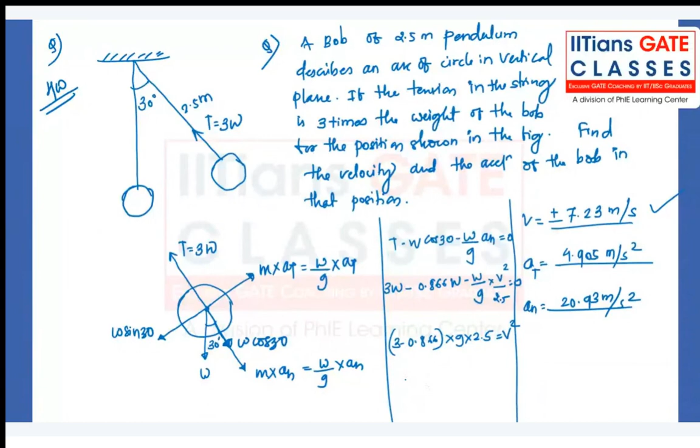Similarly, for the tangential force, if you do tangential acceleration at, so mass times at - let me go to the next slide - what we have is m*at, that is, you can say w by g. At is equal to the sine component of the weight, sine of 30, look at the figure. So this has to be equal to this, and here also you can cancel out w. And at you can calculate as g sine of 30, so at will be equal to 4.905 meters per second square.

And an, an is equal to v square by r. V square is 7.23 whole square divided by r which is 2.5, so you'll get 20.93 meters per second square. So you should be able to solve these kinds of problems as well, where you have to deal with not just a single acceleration but two components: tangential and normal.

So let's start some questions on the work energy principle. You are already aware of it - what is the work energy principle? So you should be able to solve it. We have already solved some questions on it, so this is just a problem solving session for you.

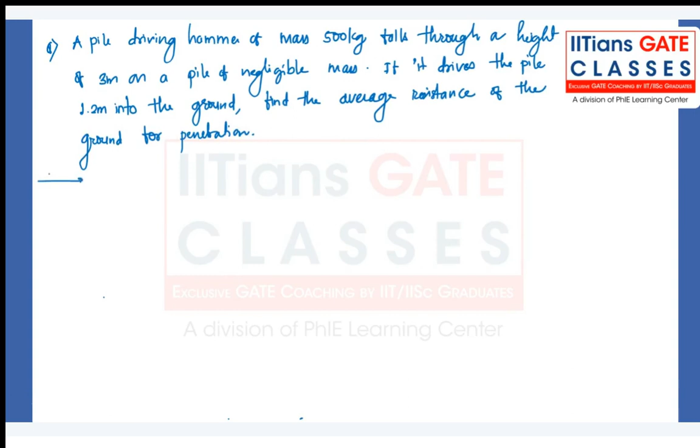A pile driving hammer of mass 500 kgs falls through a height of 3 meters onto a pile of negligible mass. If it drives the pile 1.2 meters into the ground, find the average resistance of the ground for penetration. So we have a pile driving hammer of mass 500 kg falling through a height of 3 meters, onto a weight-negligible mass pile, and if it drives the pile 1.2 meters into the ground, they are asking us to find the average resistance of the ground for penetration.

Yes, try to solve it. I'll give you one minute of time. You solve it and post your answer.

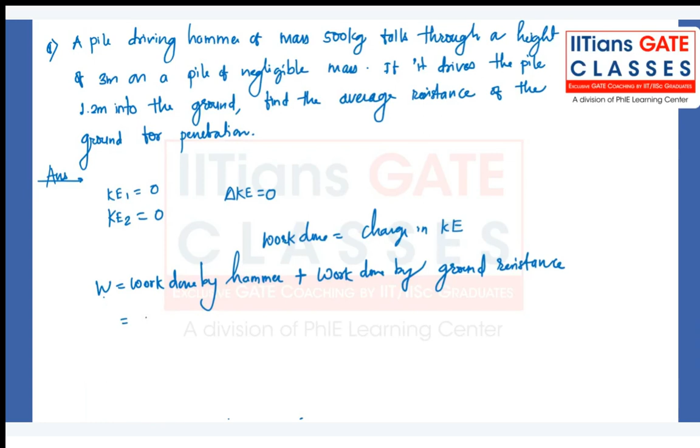And how much work is the hammer doing? The weight, mg, is the weight of the hammer, and how much distance it is traveling is h1 plus h2. Let's say this is the hammer, this is the pile. This distance given is 3 meters, and later it goes deeper inside after hammering, which is 1.2 meters. So this has h1, and h2 is equal to 1.2.

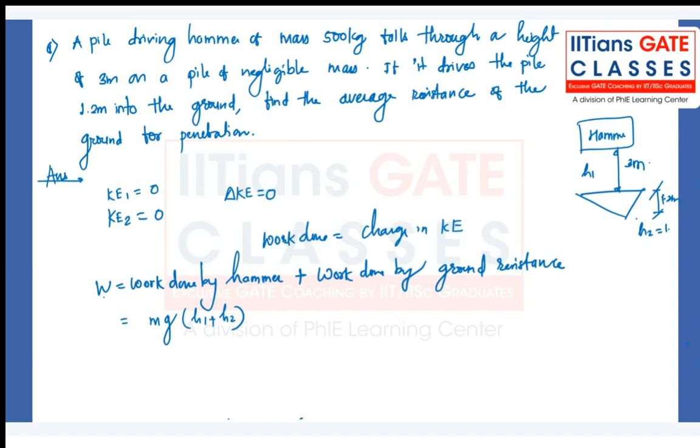So weight is mass times acceleration due to gravity, and h1 plus h2 is the work done by the hammer. The work done by ground resistance: let R be the resistance by the ground, and it will give resistance only for h2, because before that the hammer is not in contact with the pile. So the only distance traveled by the pile against ground resistance is h2. That's why R into h2 we are considering, and it is equal to 0 because work done equals change in kinetic energy.

So from this, R can be written as minus mg times (h1 plus h2) divided by h2. That equals minus 500 into 9.81 into (3 plus 1.2) divided by 1.2. If you solve it, you get around 17 kilonewton. The minus sign indicates it is opposite to the work done.

The direction of this force is opposite to the weight, so you can remove the minus sign and say it is upward. 17.16 kilonewton is the resistance of the ground for the penetration, and the direction is upward. Any doubt in this question? If it is clear, then let's move to the next.

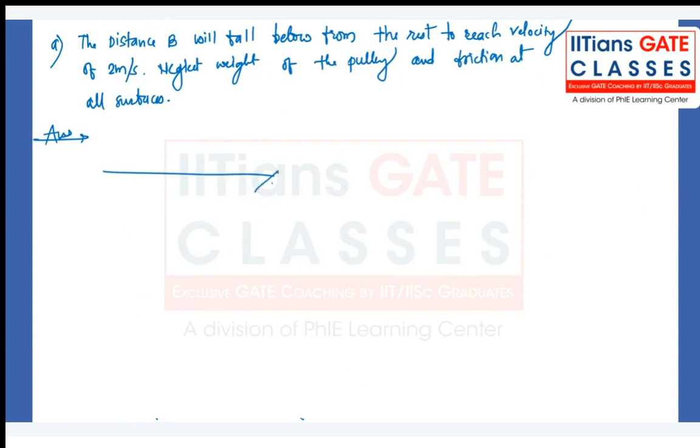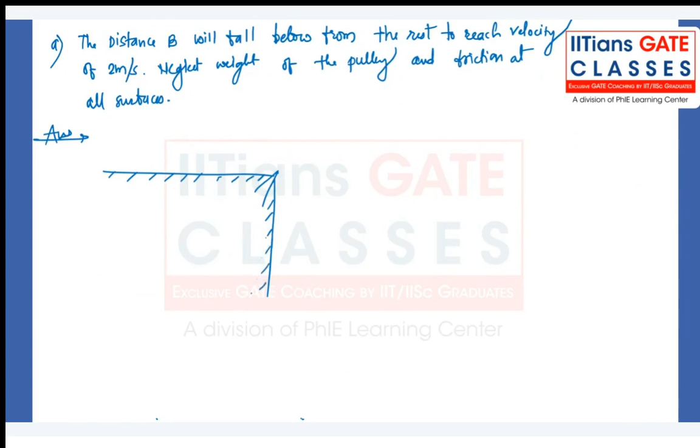Let me help you out with the figure here. A, which is 50 kg mass, is attached through a pulley to weight B, which is 80 kgs. The tension in the string, and this is a smooth pulley. So this is the diagram.

I'll repeat the question: the distance B will fall below from rest to reach a velocity of 2 meters per second. So how much distance has it traveled? That you have to calculate. Let's call it D or S, in order to achieve the velocity of 2 meters per second.

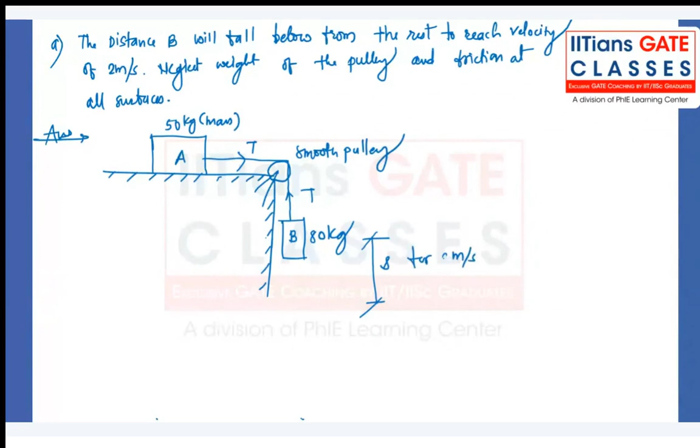So here, first we'll solve the problem without considering the friction, and next the same problem we have to solve considering the friction afterwards. So I expect you to at least try to solve it without friction first, since it will not be that difficult.

Yeah, has anyone got the answer or not yet? Maybe I'll wait for 1 more minute.

It's not that difficult. Wherever distance is mentioned in the problem, you have to solve with the work energy principle. Whenever acceleration is supposed to be calculated or involved, you have to use D'Alembert's principle. And wherever time is mentioned, you can think of the impulse momentum principle. So remember this basic logic: mainly if distance is involved or to be calculated, use the work energy principle. If they are asking you to calculate something related to acceleration, then D'Alembert's principle will help you. Keep this trick in mind.

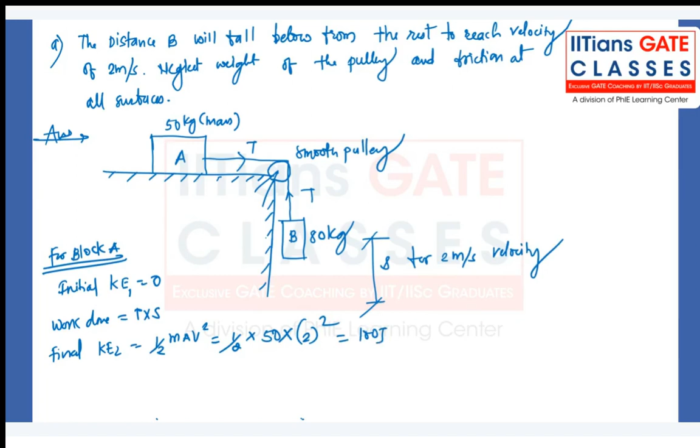If block B is moving with 2 meters per second, block A will also move with the same velocity. So K1 is initial kinetic energy, K2 is final kinetic energy, and that will be equal to 1 half m into v square. So 1 half into 50 into velocity 2 square, so it's 100 joule. The change in kinetic energy is nothing but the work done. So T multiplied by S is equal to 100 minus 0. If you know the tension in the string, you will be able to calculate the distance. So T dot S is equal to 100.

That is the first part. So if you consider now block B, we can clearly see kinetic energy 1 is equal to 0, and kinetic energy of the second block is 1 half mv square, that is 80 into 2 square, and that is 160 joule.

And work done in this case is how much? Work done will be different here. Why? Because if you look at the block, weight is acting downward, tension is upward. So work done is equal to W into S minus tension into S.

Tension is acting in the upward direction, weight is acting in the downward direction, and the body is moving in the downward direction. So total work done is W minus T times S. You can write it as WS minus TS. So it is 80 into 9.81 into S minus TS.

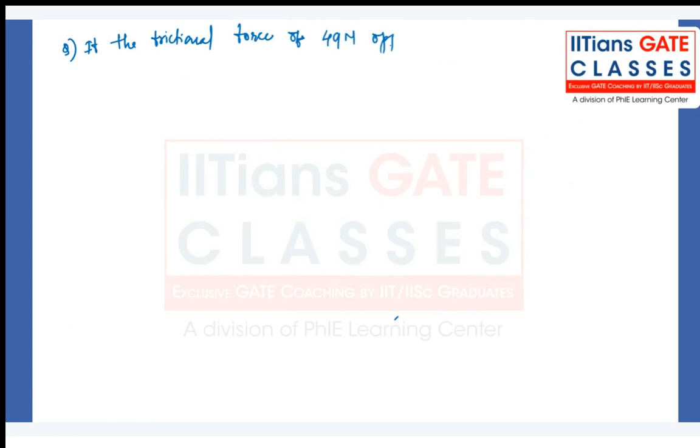Now a little bit of complexity to it. Same question you have to solve. I expect you to solve it now because you know the process. Just a little bit of difference here. If the frictional force, let me go to the next slide. The frictional force of 49 Newton opposes the motion of a... find the time required now.

A little bit different: time required for B to reach a velocity of 2 meters per second. Okay, same problem, just things are slightly changed. We've got a frictional force for body A, and rather than asking distance, now they are asking you the time.

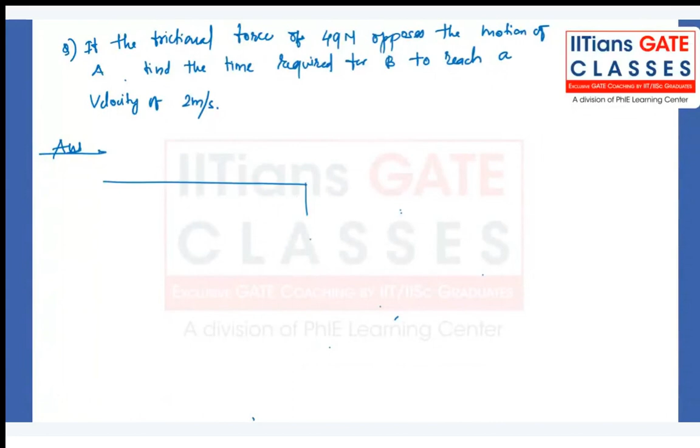Okay, we got it. Vidhi, I'll go to the previous problem once we solve this. Okay. Or it's not even needed because we are solving the same problem. Let me help you out. So here we have a pulley. Here we have a mass A, and like this we have a block B here.

Okay, so in the previous problem, the question was the distance traveled by B to reach velocity 2 meters per second.

Final kinetic energy is half of m v square. Sorry, the distance we don't know, velocity we know, that is 2 meters per second. So half of mv square. So 100 joule is the kinetic energy once it reaches the 2 meters per second velocity, and the initial kinetic energy is 0. So change in kinetic energy is 100 minus 0, that is 100, and that is equal to the work done.

Work done here is only from the force which is driving it, the tension in the string, because there's no frictional force. So tension in the string multiplied by distance traveled is equal to 100. Tension is unknown, and S is also unknown, that is the distance traveled.

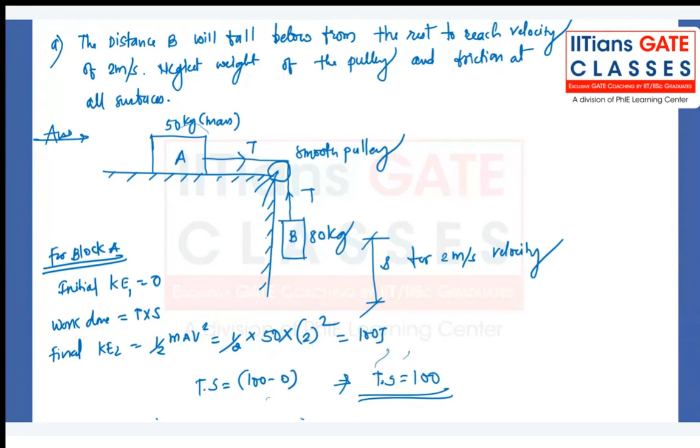So in order to calculate it, we have drawn the free body diagram of block B. In block B, we can see the motion is downward, right? But which is the driving force for this work done? That is W minus T. So work done is equal to W minus T into S, where S is the distance traveled. So W into S minus T into S is the work done.

Again, initial kinetic energy is 0, final kinetic energy is half mv square, which is 160. So 160 minus 0 is 160, and that is equal to W, which we know is 80 into 9.81, into S minus TS, which we have calculated previously, that is 100. Since it is a frictionless pulley, we can directly put 100 here.

Otherwise, this term would change. And yeah, that's all. From this, we calculate the value of S. Is it clear, Vidhi? Any doubt in the first question?

Now, the only thing that will change is the tension is not the same. Let's call it T minimum here, and T max here. Actually, no sorry - here tension will remain the same because they have given only the frictional force for block A, not for the pulley. So the only change here is we have a frictional force of 49 Newton.

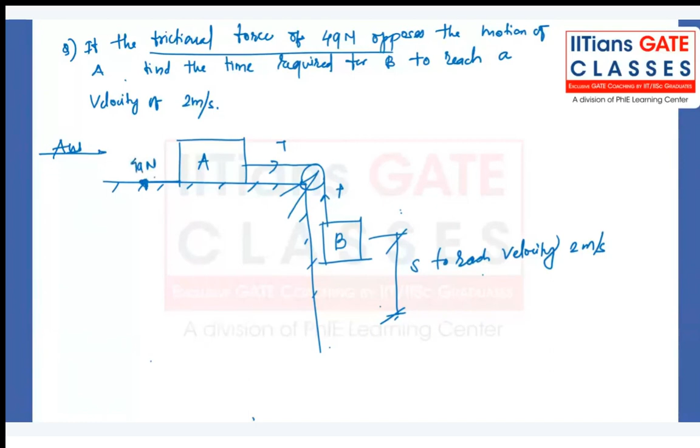Problem is the same. Let me help you out. So let's draw the free body diagram of block A. Here is the tension like this. Here we have 49 Newton force. So this is block A.

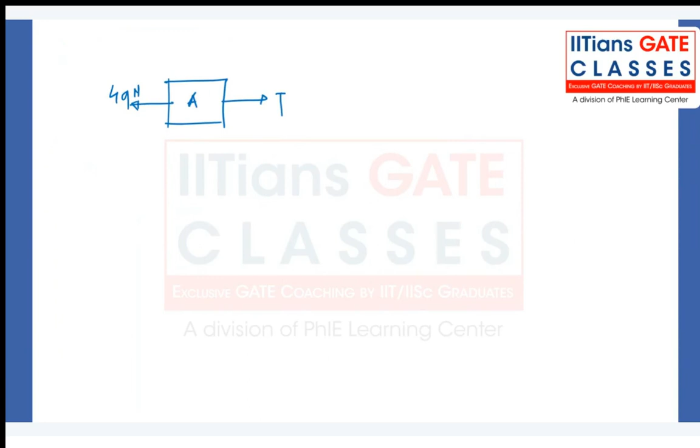The work done by block A in order to move by distance S is tension minus 49 times S, and that is equal to change in kinetic energy, which we already calculated as 100 minus 0. So here we got this equation: T minus 49 into S. This implies T into S is equal to 100 plus 49 into S.

Okay, I hope it is clear till this. Now if you consider the second block, weight is acting downward, tension is upward. So again, weight minus tension times S is equal to change in kinetic energy, which is 160, which we have already calculated, so I'll not repeat it. So here W into S.

What is W in this case? That is 80 into 9.81. So let's write it as 784.8 into S minus TS. What is the value of TS? Minus TS is equal to 160. So 784.8 into S minus TS, where TS is 100 plus 49 into S, is equal to 160.

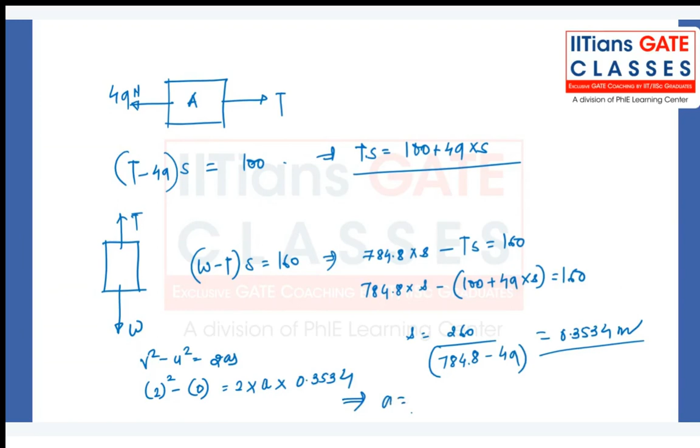4 divided by 2 is 2, divided by 0.3534 will give you 5.66 meters per second square. Now you can apply v equals u plus at. V is 2, u is 0, plus 5.66 multiplied by t. You'll get the value of t as 2 divided by 5.66, and that is equal to 0.3534 seconds.

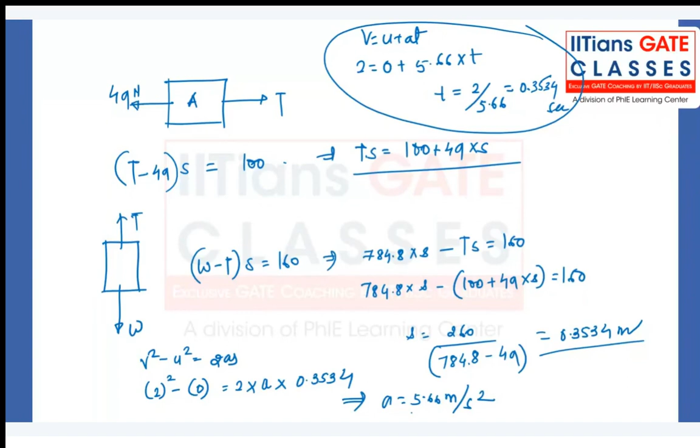I hope it is clear to you all. Any doubt? Same question, slight change we have, especially in the free body diagram of body A, and calculating the work done in that case. Any doubt? Okay, if no doubt, then let's move towards the next slide.

Before we jump into some more questions, let me give you a little bit of theory. We have studied collision or impact, right? What is the meaning of collision or impact? You can say it is a short time phenomenon in which momentum of the individual bodies undergoing collision changes significantly.

We have studied how the law of conservation of momentum works and all, but one point which I have not explained before is point E. What is E? That is the coefficient of restitution. In some questions they may involve the value of E, so you should be able to handle those kinds of problems. That's why the theoretical background of coefficient of restitution is important.

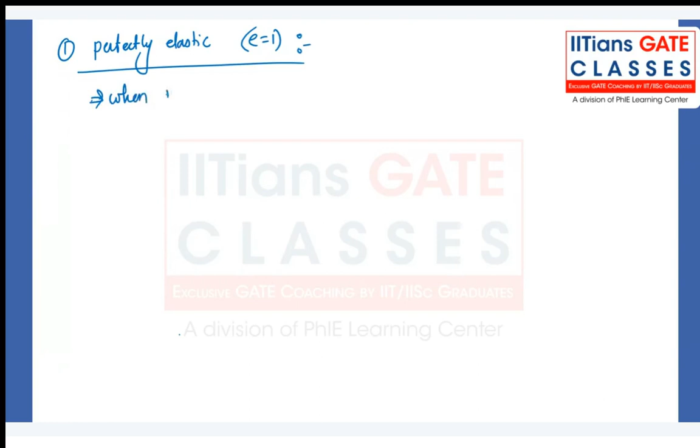So what is elastic? You can say the recovery of the shape will be there even after deformation. Whenever the initial kinetic energy is equal to the final kinetic energy, then that kind of collision is called perfectly elastic collision.

Assume you have a mass m1 moving at u1, and another mass m2 moving at u2, and if they collide over each other. In an elastic collision, they will collide, deform, and then regain their original shape, so the kinetic energy is conserved. After this collision, the velocities might change: the velocity of m1 becomes v1, and the velocity of m2 becomes v2.

What is happening here, try to understand: suppose u1 is greater than u2. What should be the value of v2, which will be greater here? Then in that case, v2 will be greater than v1. Let me help you out with the complete equation so that you will understand, as you know, the momentum is conserved — the law of conservation of momentum we have studied before.

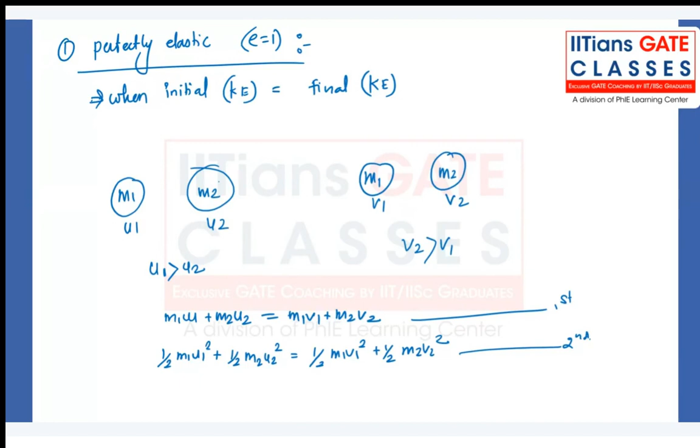So if you solve these two equations, ultimately what you will come up with is u1 minus u2 is equal to v2 minus v1. What is u1 minus u2? This is nothing but the velocity of approach before collision.

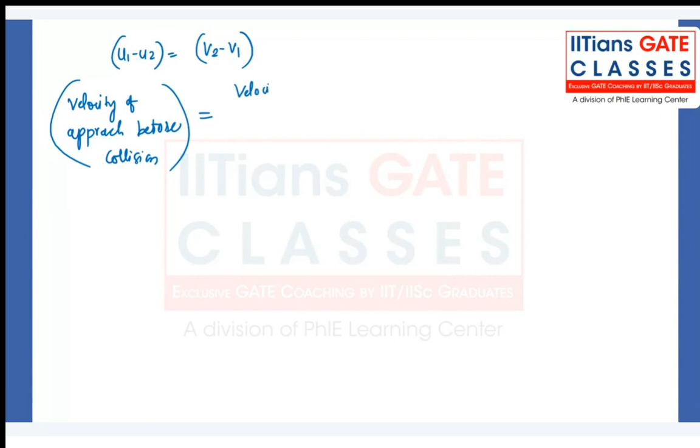So I hope now you understood what is the value of E. E is velocity of approach, which is u1 minus u2, and this is the velocity of separation, which is after impact or after collision.

So E is equal to 1 means, in this case, velocity of separation divided by velocity of approach is the same. Okay, and that is what we are saying. After you solve those two equations which I have given you on the previous slide, you should be able to get this relationship.

Let's try to understand some special cases in this. If m1 is equal to m2, what do you conclude about the velocities? Can anyone tell me about the velocities? Let me go to the next slide here, and I'll write the three situations which I wanted to discuss.

First case: m1 is equal to m2. Can you tell me how u1 and u2 will look like? Second situation: the second body is fixed, and u is in the direction u1, so u2 is 0 - can you tell about v1? Third situation: again the second body is fixed, and the first body is coming with velocity u, making an angle theta. How will the velocity look like?

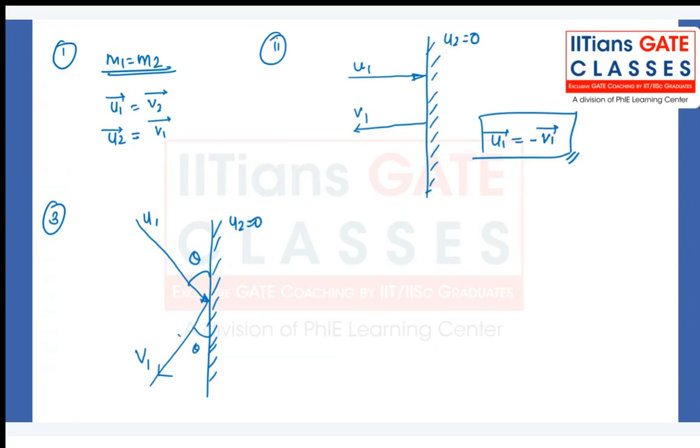Yes, correct. Coming towards the second scenario, that is perfectly inelastic or plastic collision. In this plastic collision, E is equal to 0. So what is the meaning of it?

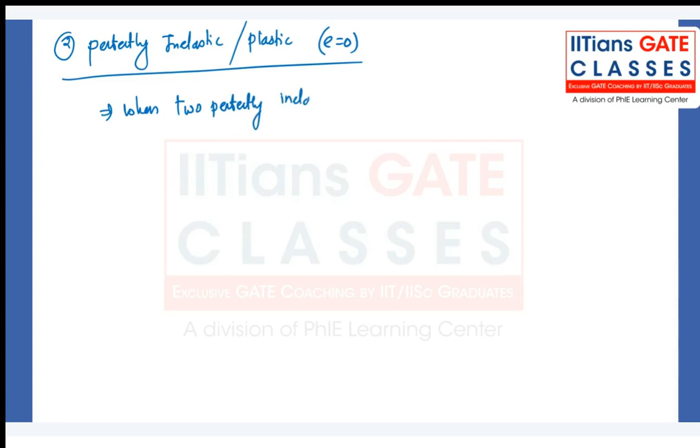When two perfectly inelastic bodies moving along the same line collide, they stick to each other. Basically, they deform, you can say - they are sticking to each other, meaning they are deforming, and then you call it a plastic collision.

So, as I said, mass m1 moving with velocity u1 collides with mass m2 moving with velocity u2, and after the impact, let's say m1 plus m2 is the combined mass moving with velocity v, like this for example. Okay, just give me a minute.

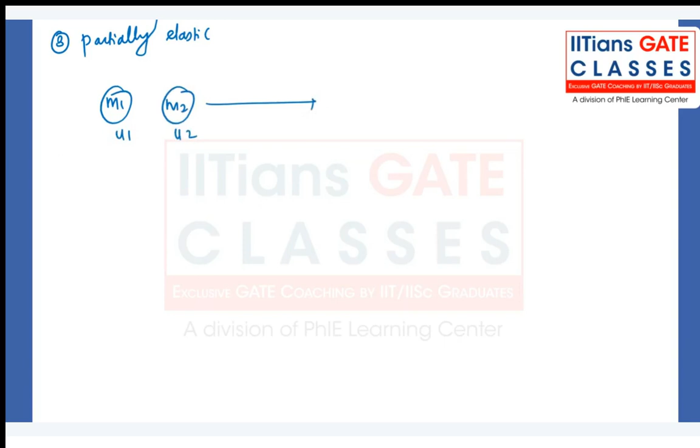The last one is partially elastic. Let me explain how it will look. Two bodies, M1 moving with velocity U1, another body M2 moving with velocity U2. After the impact, they deform a little bit and then regain their original shape a little bit. So it's a combination of deformation. They will have some deformation, whereas in the previous case the complete deformation is there and they will not regain their own shape. Here there's a little bit of deformation.

M1 V1, M2 V2. So m1 u1 plus m2 u2 is equal to m1 v1 plus m2 v2. That is always there, the law of conservation of momentum.

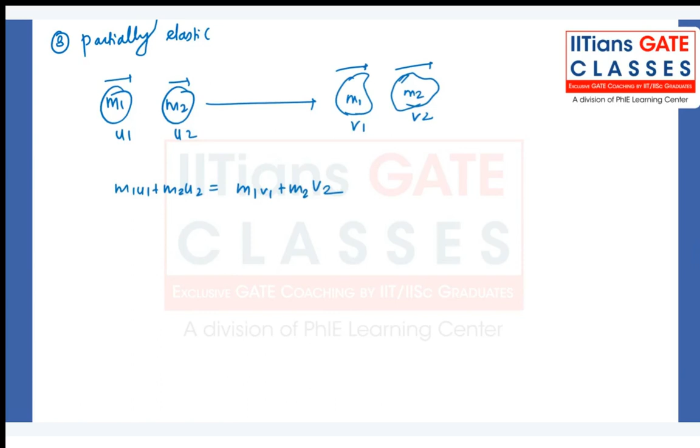But in this case, the velocity of separation, that is v2 minus v1, is equal to e times velocity of approach, that is v2 minus v1 is equal to e times u2 minus u1, or u1 minus u2. So this is what you should know.

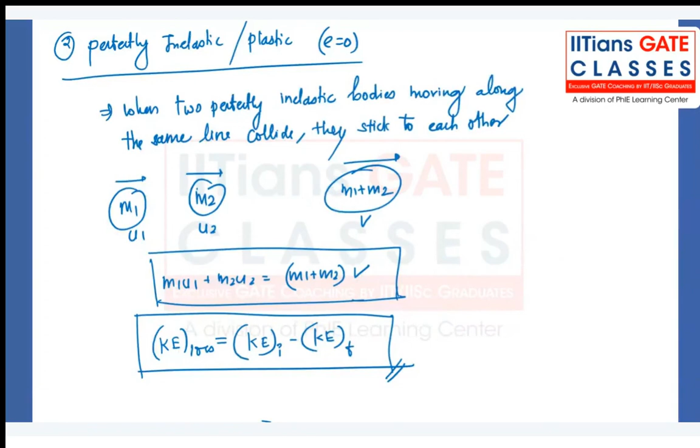And in the previous case, the final velocity is v, so v2 minus v1 is 0. Basically the final velocity v2 minus v1 is 0 in this case, and that is what we are calling v. That is the reason. I hope it is clear to you all.

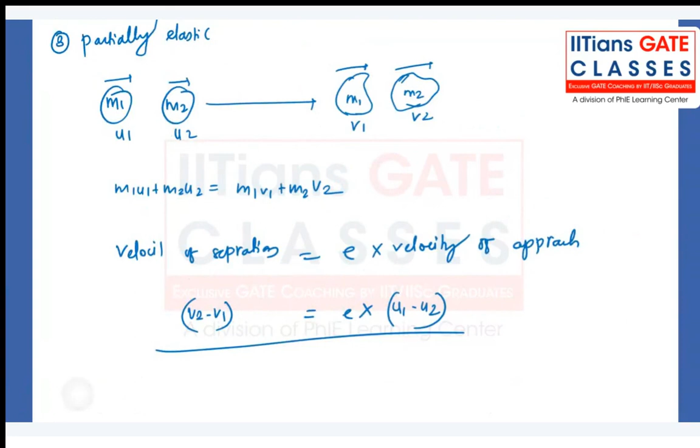So in case the term e, that is coefficient of restitution, comes into the question, you should not worry. Same approach what we have used previously, you have to use; just the value of e will make a slight change in the problem, that's all. I hope it is clear.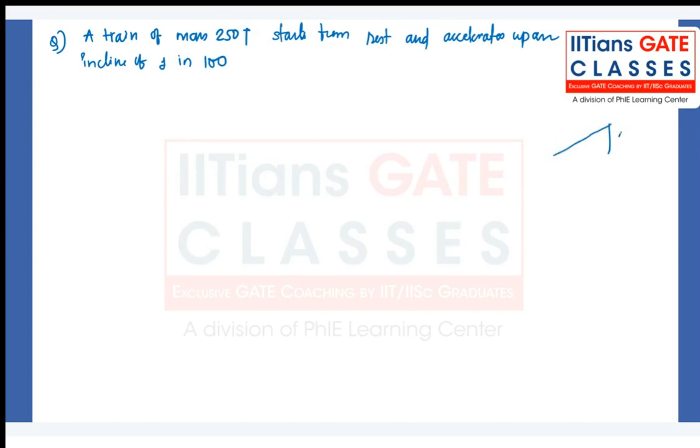Okay, let me bring some more questions. A train of mass 250 ton starts from rest and accelerates up an incline of 1 in 100. So 1 in 100 incline means for height, 100 is the diagonal. Remember, they are talking about sine of alpha is equal to 1 by 100, just to avoid confusion.

Attaining a speed of 45 kilometer per hour after traveling 250 meters, full stop. The frictional resistance to motion is 30 kilonewton. Find the work done by the locomotive. This is the first part: find the work done by locomotive.

And the second part is: find the tractive force, assuming constant tractive force. So two things you have to find out.

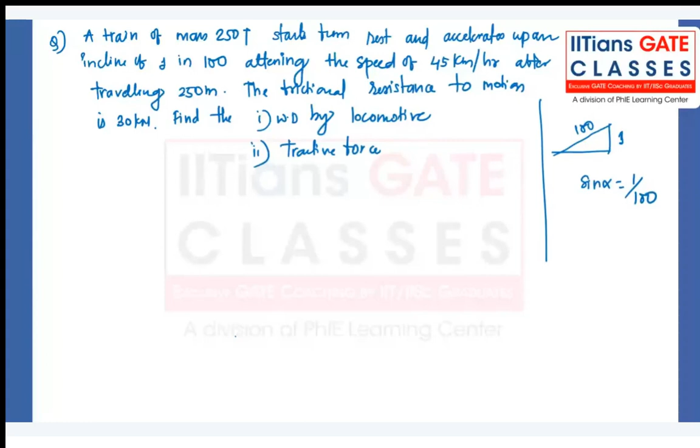You already know the way to solve it - drawing the diagram, free body diagrams and all - so I'll not go into the details, you have to solve it. I'll wait for 1 or 2 more minutes for your answer. You should be able to solve this. Solve it. Anyone have solved? One more minute, I'll wait. You should solve it, it's not that difficult.

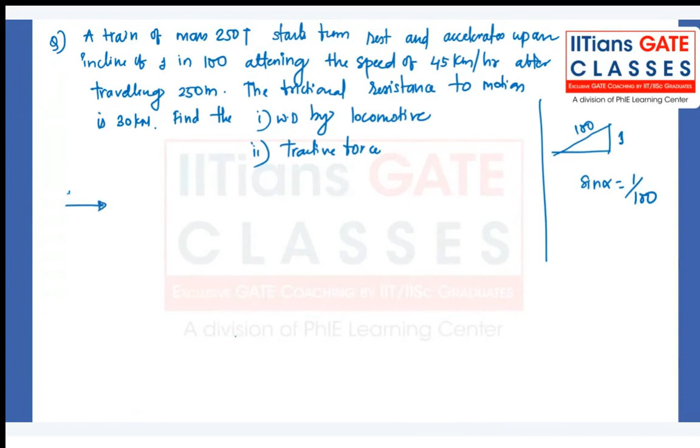The question is like this: we have a surface with angle alpha, where sine alpha is 0.01. Weight is acting downward. This component is W cos alpha, and here we have W sine alpha.

Here we have the tractive force, and the frictional force acts in the leftward direction. Here we have the normal reaction. Starting from rest, the train of mass 250 tons starts from rest and accelerates upward on this inclined plane, attaining a speed of 45 kilometers per hour.

So basically u is 0, and v equals 45 into 5 by 18, or 1000 divided by 3600, gives you the value of v. And how much distance is traveled? It travels a distance of 250 meters, so s equals 250 meters, that is given.

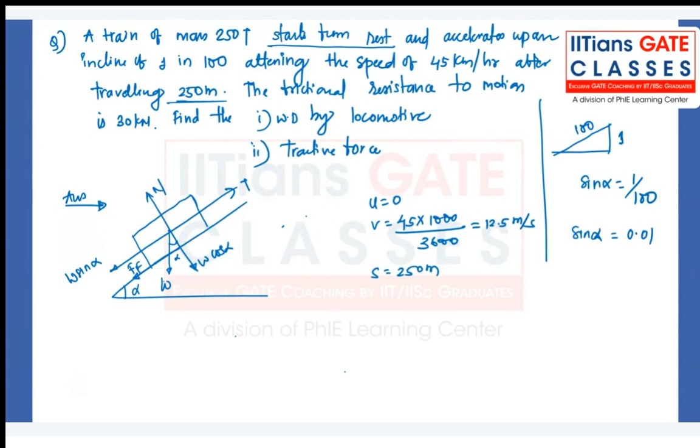Also, how much is the frictional force? The frictional resistance to motion is 30 kilonewton, so frictional force is 30,000 newton.

If you apply the work-energy principle, work done equals change in kinetic energy. How much work is causing this change in kinetic energy is this traction force, Ft. So Ft minus mg sin theta, the W sin theta component.

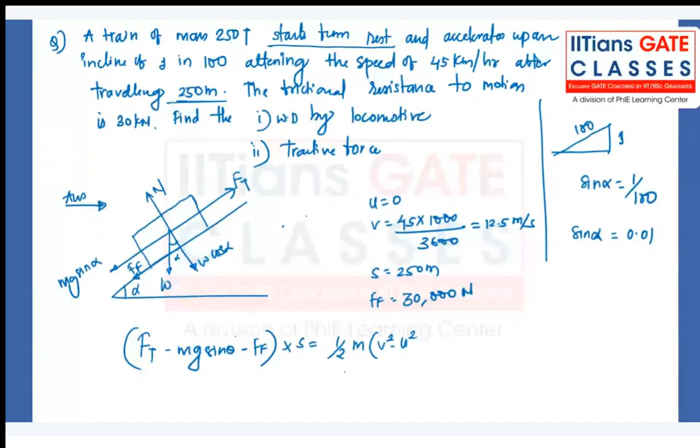and minus frictional force. This is the force which is causing a displacement of s, resulting in the change in kinetic energy, which is half of mv square minus half of mu square. So in this equation, if you put the values, you should be able to get the answer.

So Ft minus mg sin theta: mass is 250 tons, so 250 into 1000 into 9.81 into sine of theta, which is 0.01, minus 3000 (frictional force) into 250 meters, the distance traveled, equals half of m, again mass 250 into 1000.

times 12.5 squared minus 0 squared. This will give you the answer: Ft, the tractive force, is around 132650 Newton. If you put this into work done, work done is Ft into S, that is 132.650 kilonewton.

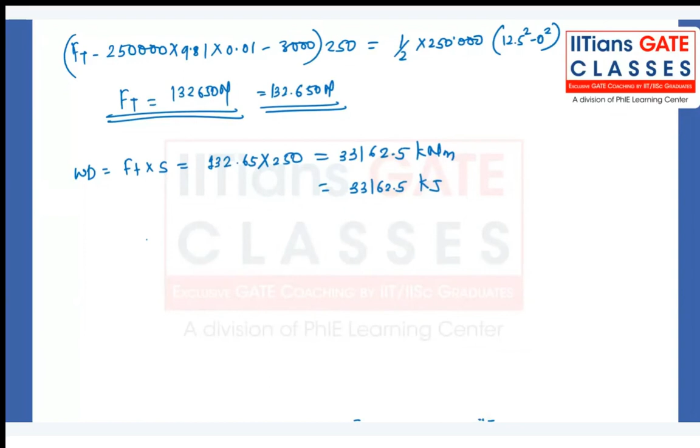Okay, let me check if I have any other problem.

See, what I was talking about is the problems related to angular accelerations. Maybe I'll give simple questions so that you will understand what I'm talking about.

So basically, v equals u plus at. You also know s equals ut plus half of at square. And what was the other formula? V square minus u square equals 2as. All these formulas you can write in terms of angular velocity and angular acceleration as well, and these formulas are applicable for constant acceleration.

We generally use the terms v, u, a in linear coordinate systems, for linear problems. When a problem is in an angular coordinate system, things are the same, but the way of writing is a little different: omega equals omega naught plus alpha t. I've explained before what omega is. Distance is more or less like theta, omega is more or less like velocity, and alpha is the acceleration. So you just replace these terms with theta, omega, and alpha. We studied this in the fixed axis rotation topic.

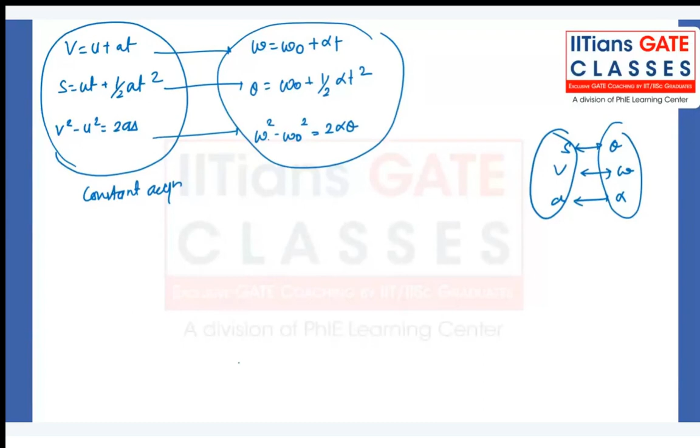So just to recall how the equations look: theta equals omega naught t plus half of alpha t square, and omega square minus omega naught square equals 2 alpha theta. You don't have to worry when problems are in this format; just the way of writing the variables is changed. You replace v with omega, s with theta, and a with alpha, because we're talking about angular velocity, angular acceleration, angular displacement. Nothing is different here, but remember these formulas are applicable for constant acceleration, because alpha is not changing here, it is constant.

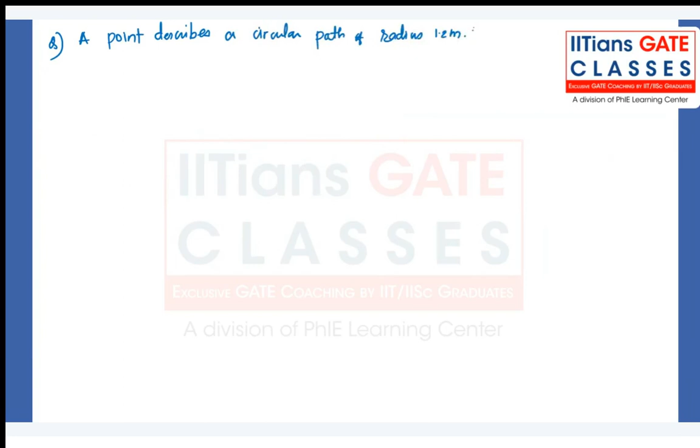Considering this, I'll give you one or two questions so you become habituated with this kind of question as well. A point describes a circular path of radius 1.2 meter. The angular velocity and angular acceleration...

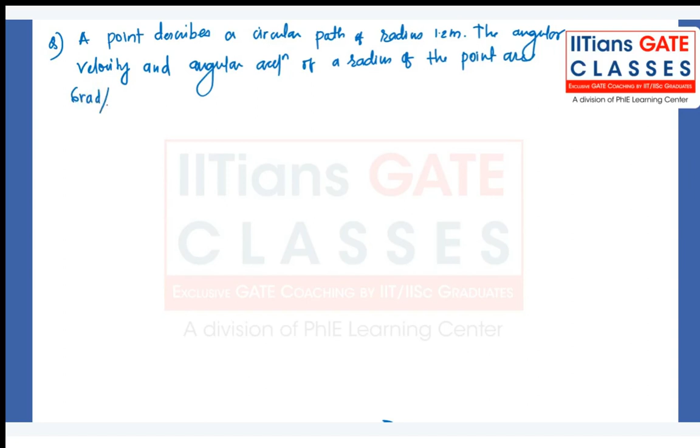A point describes a circular path of radius 1.2 meter. The angular velocity and angular acceleration of the point are 6 radian per second and 3 radian per second square, both clockwise. If the angular acceleration is constant, determine for a given instant and at 6 seconds later the normal and tangential components of acceleration of the point, and the angle turned through in 6 seconds.

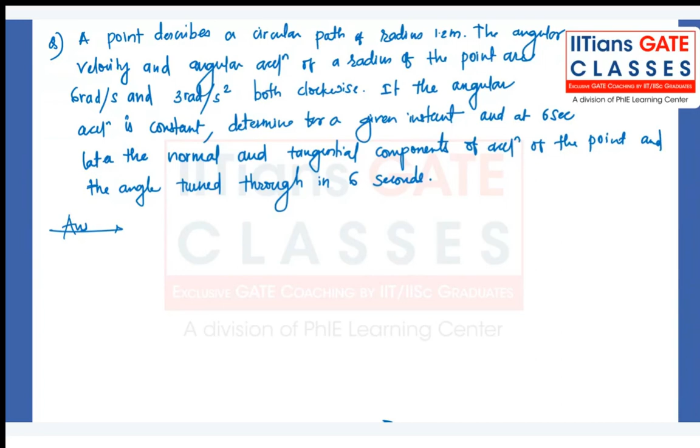Okay, let me read this question again. A point describes a circular path of radius 1.2 meter. The angular velocity and angular acceleration of the point are omega naught equal to 6 radian per second and alpha equal to 3 radian per second square, both clockwise. If the angular acceleration is constant, determine the velocity and, for a given instant and at 6 seconds later, the normal and tangential component of the acceleration.

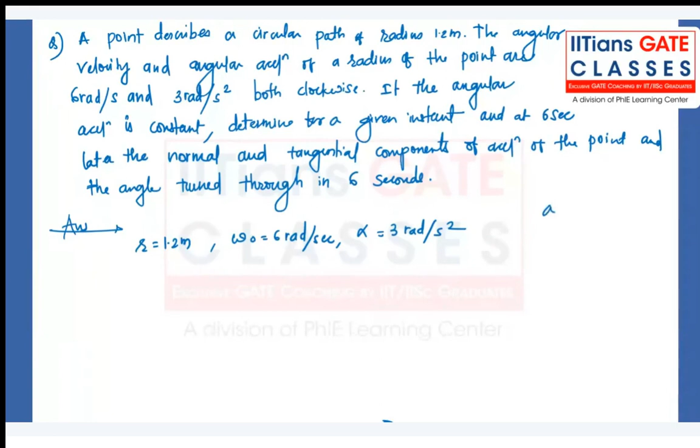So what they're asking is at the same instant and after 6 seconds, AT and AN. You know AT is R times alpha, and normal component of acceleration is R omega square. So at that instant it is very simple, nothing to do, just put it in the formula and get the answer. But after 6 seconds you may need some equations of motion to apply in order to get it. So at that instant, what is the answer? What is the tangential component of acceleration and normal component of acceleration? Fast, it's not that difficult.

R is 1.2, alpha is 3, so it's 3.6 meters per second square. R is 1.2 into 6 square, it is 43.2 meter per second square, right? But what about now, after 6 seconds? Can you tell me now the acceleration AT and AN after 6 seconds?

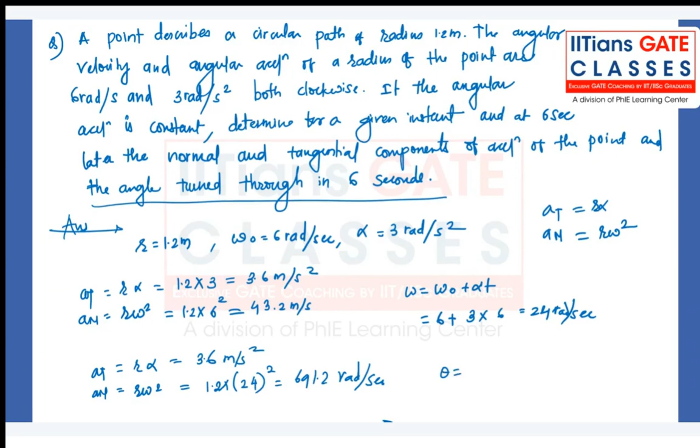S is equal to ut plus half a t square, right? So omega naught t plus half of alpha t square. Omega naught is 6, t is 6 seconds, plus half of alpha is 3, t is 6 square. So 6 multiplied by 6 is 36, plus 6 square is 36 divided by 2 is 18. 18 multiplied by 3 is 54. 54 plus 36 is 90 radian. So the answer in this case is 90.

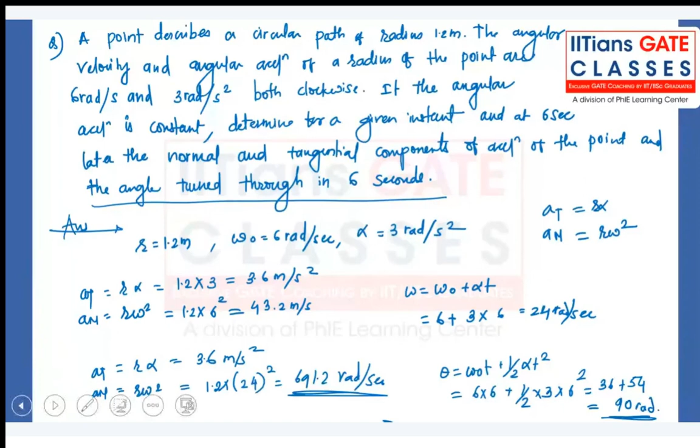So are you following? Whenever the question involves uniform angular acceleration, you should not worry, you apply the same set of formulas. And the same is applicable for the variable acceleration problem. In variable acceleration problems also you don't have to worry, same approach: differentiate with respect to t.

You will get theta, omega you will get as d theta by dt, and again if you differentiate you will get alpha, that is d omega by dt. That's all. So the approach is the same, just your way of calculating, or the way you are writing the variables, is different.

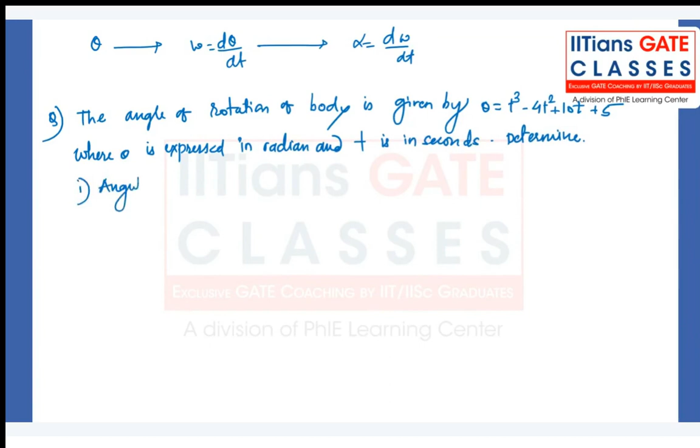Let me give one question so that you will be aware. The angle of rotation of a body is given by theta equal to t cube minus 4t square plus 10t plus 5, where theta is expressed in radian and t is in seconds. Determine: first, angular velocity and angular acceleration; second, angular velocity and angular acceleration of the body at start and after 5 seconds; and third, angular displacement in the 4th second. Okay, solve this.

Okay, again a very simple question, just with variable acceleration. It's not a constant acceleration problem, so you cannot apply the equations of motion v equal to u plus at, s equal to ut plus half at square and all that.

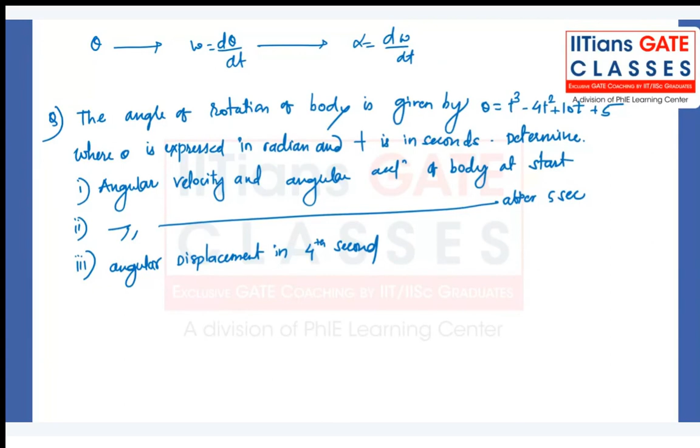Okay, some of you already solved it. Yes, omega naught is 10, alpha is -8, after 5 seconds. Initially it is very simple. Let me go to the next slide. To solve it, theta is equal to t cube minus 4t square plus 10t plus 5, so omega will be equal to d theta by dt.

Omega is equal to d theta by dt, that is 3t square minus 8t plus 10, and alpha is equal to d omega by dt, and that is equal to 6t minus 8.

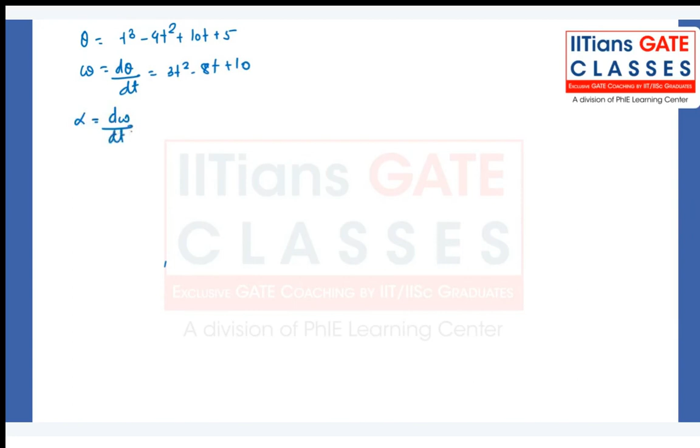So at start, means at t equal to 0, theta will be equal to 5, omega will be equal to 10, and alpha equal to -8. That's all, because you just put the value of t in these three equations, 1, 2, and 3, and you will get the values of theta, omega, and alpha.

They are asking you only omega and alpha, so you can call it omega naught and alpha naught. What they are asking next is angular velocity and acceleration after 5 seconds.

Omega 1 will be equal to 3 times 5 square minus 8 times 5 plus 10, that is equal to 45, and acceleration, alpha is equal to 6 times 5 minus 8, that is 22 radian per second square. This is radian per second. So this is your first answer, and this is your second answer, angular velocity and acceleration after 5 seconds.

Third is angular displacement in the fourth second. So angular displacement in 4 seconds you have to calculate, that is theta 4, and theta 3, and then calculate theta 4 minus theta 3. That will be angular displacement in the fourth second, because theta 4 is angular displacement in 4 seconds and theta 3 is angular displacement in 3 seconds. So if you subtract, you get angular displacement in the fourth second.

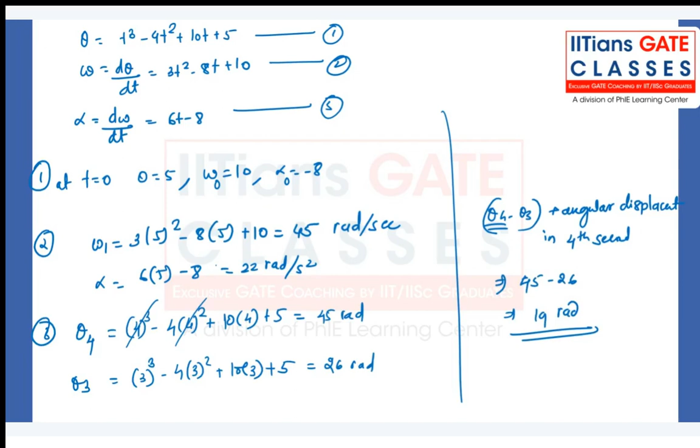That's all. Some of you already answered it. Let me give you one more question on the same angular velocity acceleration approach.

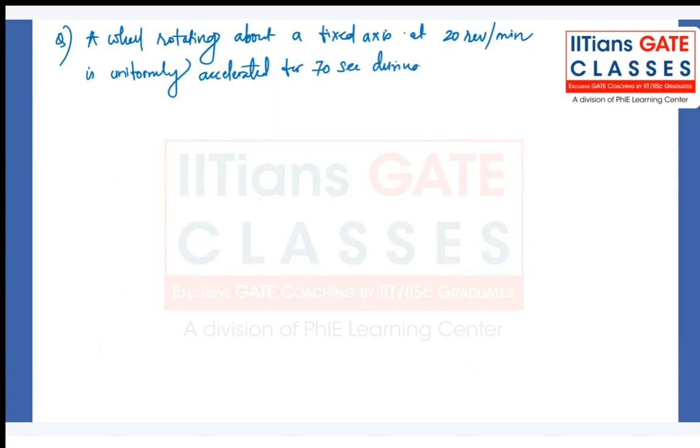A wheel rotating about a fixed axis at 20 revolutions per minute is uniformly accelerated for 70 seconds, during which time it makes 50 revolutions. Find, first, the angular velocity at the end of this interval. Second, the time required for the velocity to reach 100 revolutions per minute.

Okay, I will wait for 2 minutes. You try to solve it and tell me the answer.

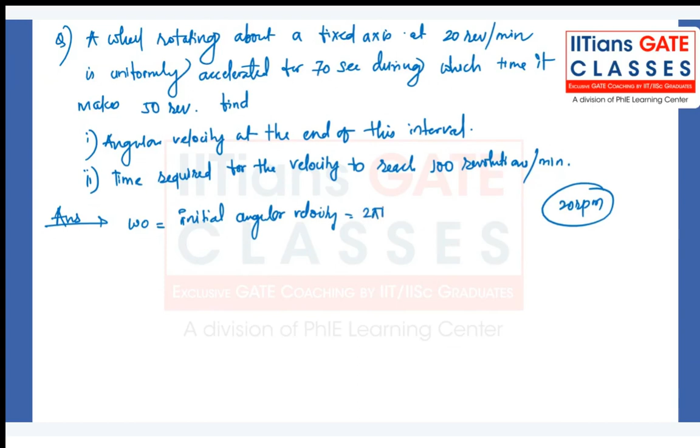So in order to convert into radian per second, what you do is 2 pi n by 60. If you do that, you get it in radian per second. So 2 pi into 20 divided by 60 will give you 2.094 radian per second. This is the omega value.

This is uniformly accelerated for 70 seconds, during which it makes 50 revolutions. So theta is what? 50 revolutions, so 2 pi into 50 will be close to 314.15 radian.

So this much angular displacement it has traveled in 70 seconds. This will give you a way to calculate the angular acceleration alpha.

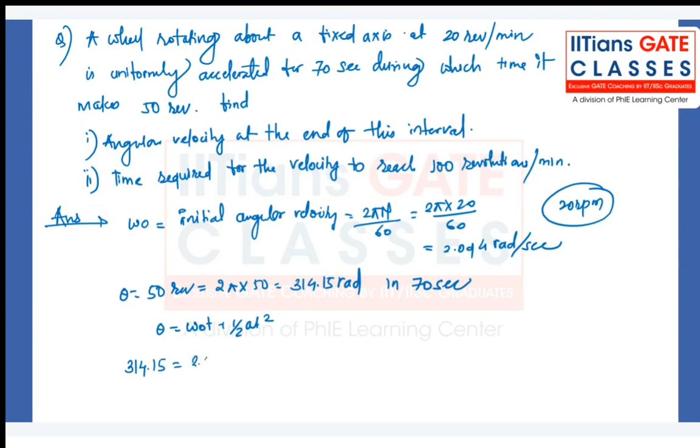So you know theta is equal to omega naught t plus half of alpha t square. Theta is already known, that is 314.15, and omega naught is 2.094, t is 70, plus half of alpha times t square, that is 70 square. If you use this, you will get the value of alpha, 0.0684 radian per second square.

Okay, this is how you will get the alpha. What they are asking is to calculate the omega, that is the angular velocity at the end of the interval. So omega is equal to omega naught plus alpha t. That is equal to 2.094 plus 0.0684 into 70, which will give you the value of omega.

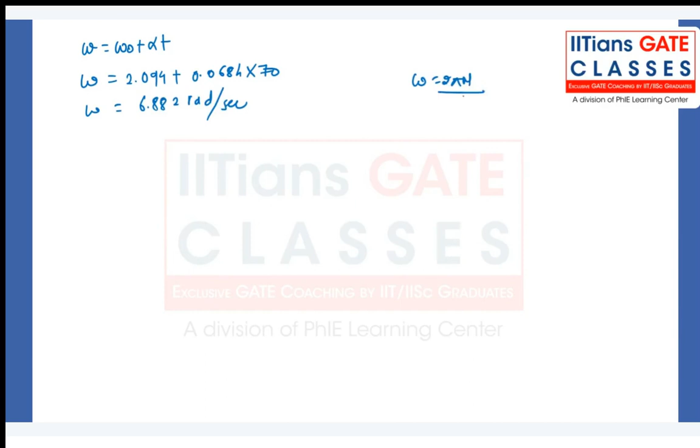And that is 6.882 radian per second. If you want to convert it into RPM, omega is equal to 2 pi n by 60. N will be equal to omega into 60 divided by 2 pi. So 6.882 multiplied by 60 divided by 2 pi will give you the RPM value. It is close to 65.718 RPM.

And what else they are asking is the time required to reach the velocity of 100 RPM. 100 revolutions per minute means 100 RPM. So omega 1 for the second problem is given as 100 RPM. So this should be equal to 100 into 2 pi by 60. It is 10.472 radian per second. So we got the omega 1.

So v is equal to u plus at, or in this format, omega is equal to omega naught plus alpha t. That is 10.472 is equal to omega naught, which is 2.094, plus alpha we just calculated, 0.0684, into T1. So T1 is equal to 10.472 minus 2.094 divided by 0.0684.

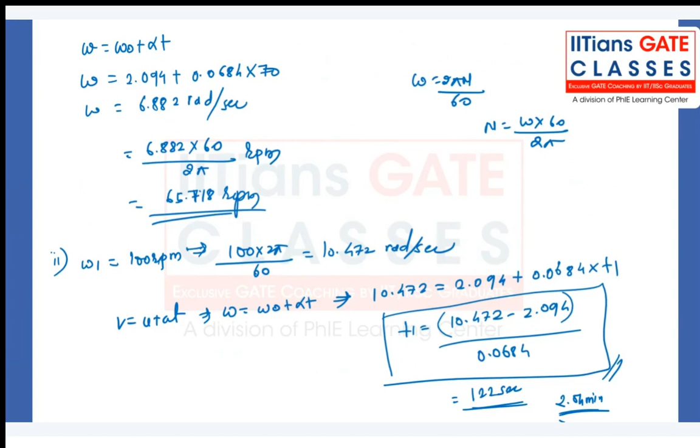We have some more time, so let's take one or two more questions.

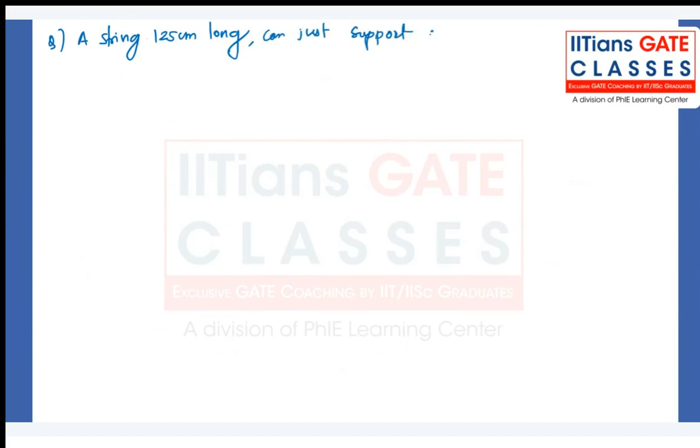A string 125 centimeter long can just support a weight of 5 kg. A mass of 6.33 kg is tied at its end and revolves uniformly on a horizontal table. The other end of the string is being attached to a fixed point on the table.

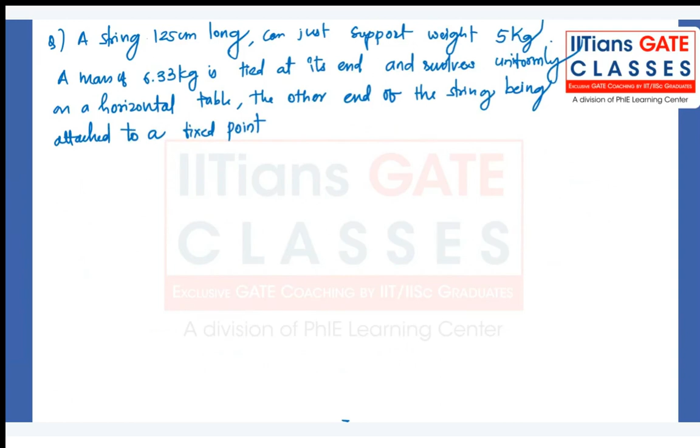Find the maximum rotational speed in RPM attained by the string without breaking.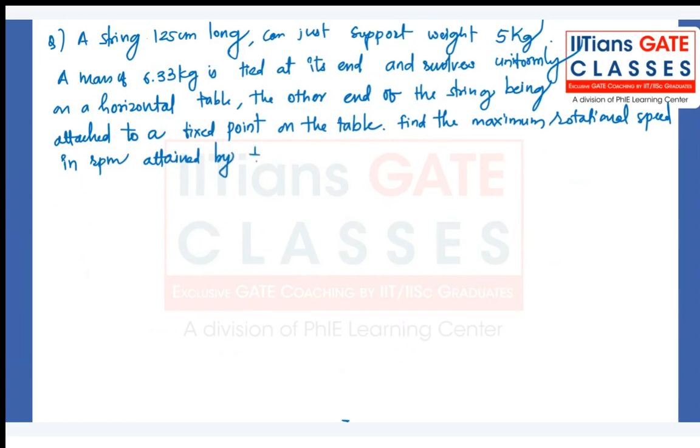Okay, try to solve this question. A string which is, let's say, r is equal to 1.25 meter can just support a weight of 5 kg, but a mass of 6.33 kg is tied at its end and revolves uniformly on a horizontal table. The other end of the string is being attached to the fixed point on the table. Find the maximum rotational speed in RPM attained by the string without breaking.

So maybe this is the circular motion of the string. This is the fixed point, let's call it P. Because of this weight, T is the tension. And let's say it's rotating in this direction, omega. Try to think on it and solve this question.

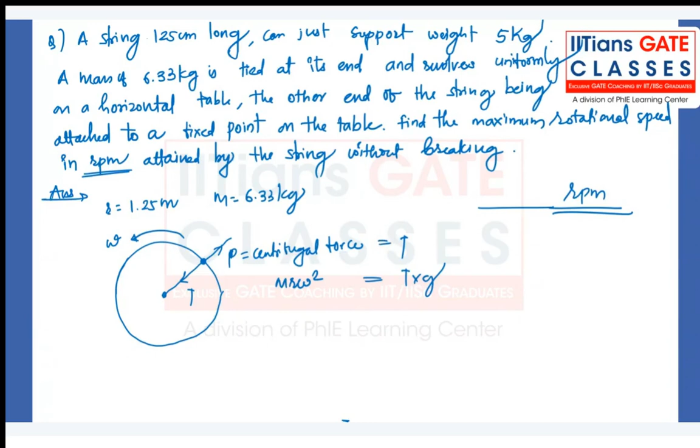Omega, if you want to calculate from this, it will be under root of T times g divided by m r. So it will look like 5 into 9.81 divided by m, which is equal to 6.33, into 1.25, which is the radius or length of the string. And if you calculate it, you'll get around 2.49 radian per second.

Then in order to convert into RPM, 2.49 into 60 divided by 2 pi, if you do, you should get 23.77 RPM. So 23.77 is the correct answer in this case. Yes, correct, Punya, you are right. 23.77 is the correct answer.

Now one more question I'll give before we end. Just a short question. We have some more time, let's take one or two more questions.

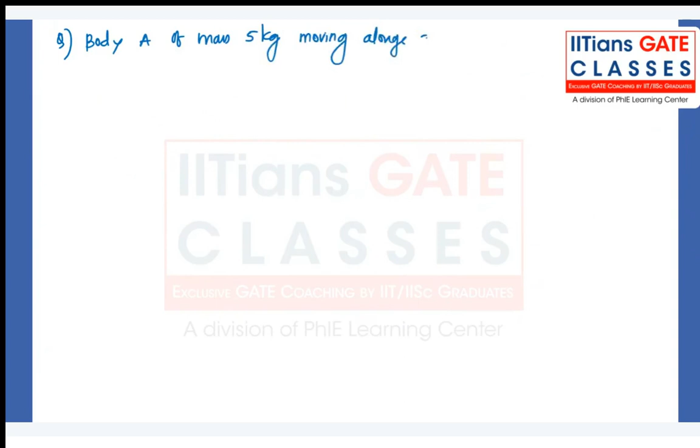Body A of mass 5 kg moving along a straight line with velocity 5 meters per second strikes another body B of mass 10 kg at rest. If the bodies are perfectly plastic, determine their velocities and loss of kinetic energy after the impact.

After the impact. This is based on the concept which I have explained to you just some time back about perfectly plastic, or inelastic, collision. So use that approach to solve this question.

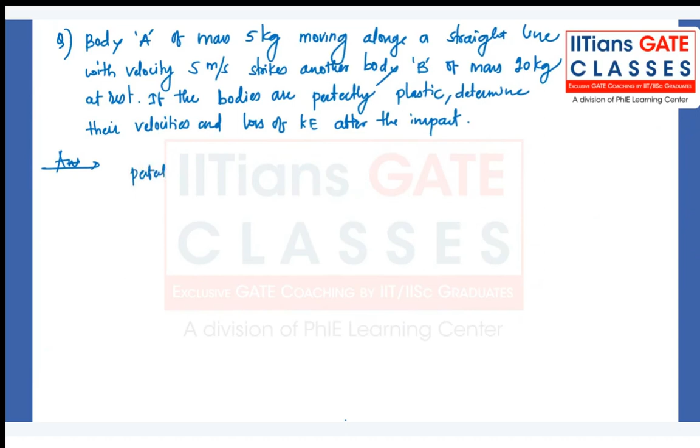Anyone have solved it? It's perfectly plastic bodies, so momentum is conserved. Perfectly plastic bodies means e is equal to 0. Remember this, so velocity after the collision will be same for both bodies.

We have studied this before, so it shouldn't be a problem to solve. What they are asking is loss of kinetic energy. That formula also I have given you: loss in kinetic energy is kinetic energy before impact minus kinetic energy after impact. It's a very simple question, you should be able to solve it.

So what is the value of the velocity, and loss in K? First answer is in meters per second, and second one in joules.

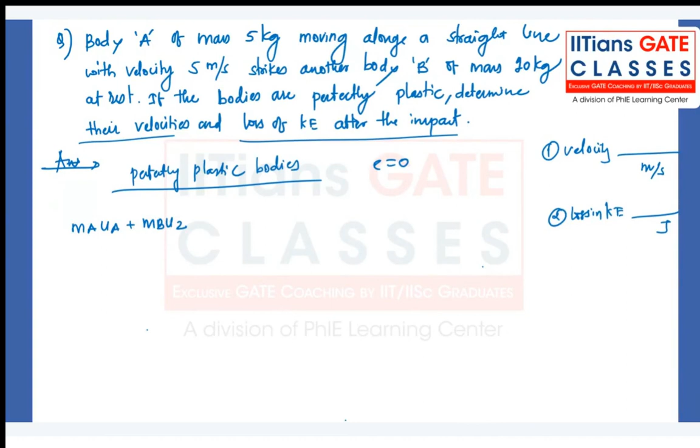Okay, let me help you out. MA UA plus MB UB, it's the momentum before the impact, and that is equal to MA plus MB times velocity after the impact. So momentum is conserved. Body A is 5 kg moving with velocity 5 meters per second, plus body B, which is 10 kg and at rest. So 5 into 5 plus 10 into 0 is equal to 5 plus 10 into V. So V is equal to 25 divided by 15, which is close to 1.667 meters per second.

Okay, second part of the question is loss of kinetic energy. Loss in kinetic energy is K before minus K after. K before is half MA UA square plus MB UB square, minus K after the impact which is half of MA plus MB into V square.

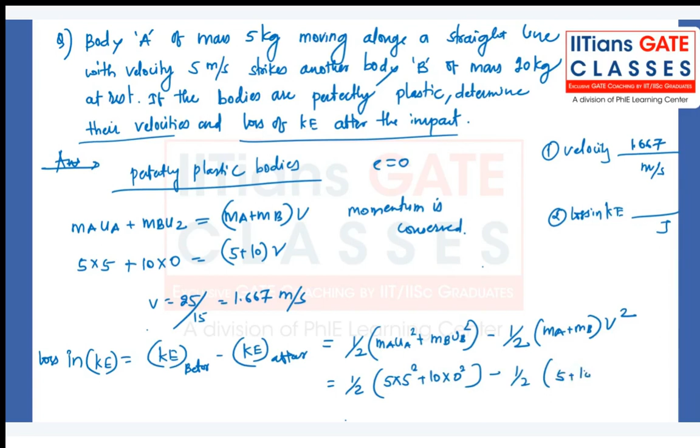So it is half of 5 into 5 square plus 10 into 0 square, minus half of 5 plus 10 into 1.667 whole square. So it's 5 into 5 square, 25 divided by 2, 12.5 into 5, minus again 15 by 2 is 7.5 into 1.67 whole square. You should get close to 41.65 joules.

Some of you already answered it correctly, but this is the way to solve it. You should be aware of plastic collision, elastic collision, and partially elastic collision. That is the overall intention behind this problem.

One more question I'll give for homework. You try whenever you get some free time.

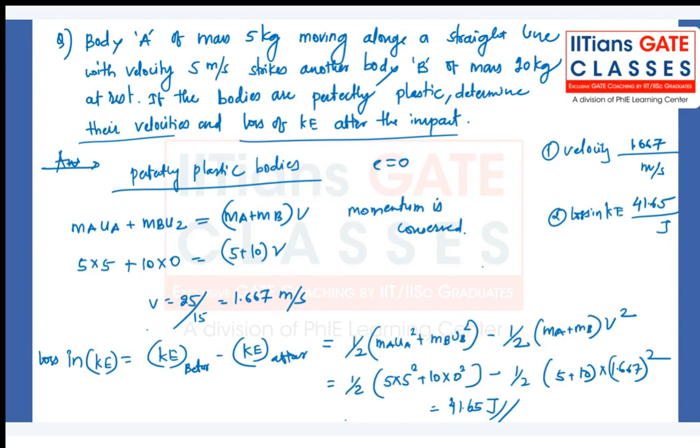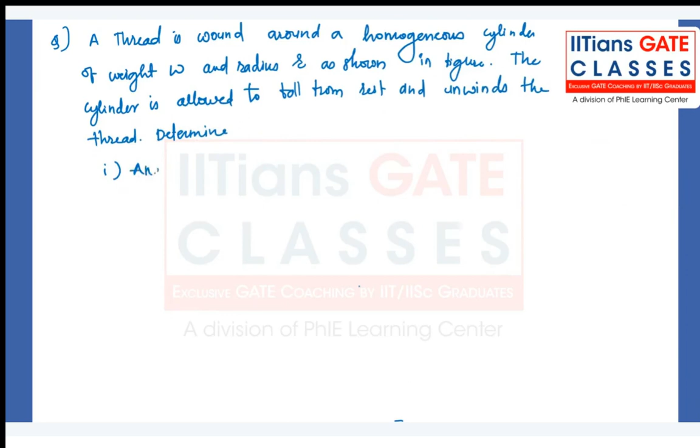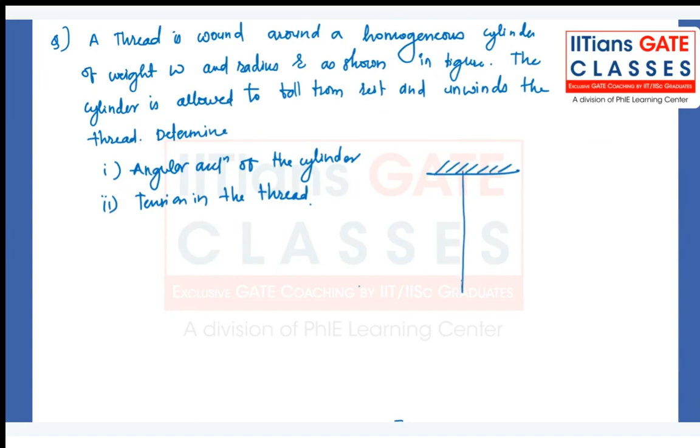Solve this question, let me draw the diagram. Okay, like this: W, O, and let's say this is R, tension. The thread is wound around the homogeneous cylinder of weight W and radius R as shown in this figure. The cylinder is allowed to fall from rest and unwinds the thread. You can imagine the thread getting unwound. What they are asking here is to calculate the angular acceleration of the cylinder, alpha.

The answer for this is 2g by 3r. And second one is the tension in the thread, for that you should get W by 3. Solve this question during your free time and check your answers with this, you should match the answer. If you face any difficulty, feel free to reach out to me through WhatsApp, or you can post it in the group as well, I'll send the solution.

So that's all we have for today. In the next session, we will study the remaining topics, virtual work and Lagrange theorem. And after that, we'll have one more session where I'll bring some more questions from the overall syllabus. So that's all we have for today.